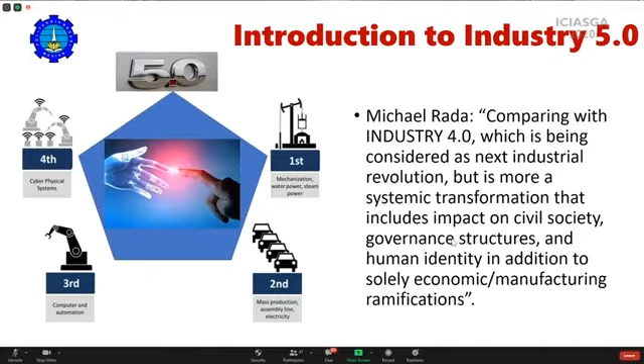This is the comparison, because it's realized that Industry 5.0 just started this year, maybe 2020. Before 2020 we called it Industry 4.0, but starting from maybe 2020, it will be moved to Industry 5.0. I will give the example of the 4.0 project in NTU in the next slide.

Industry 4.0 is the introduction of connected devices, data analytics, and AI. So if your manufacturing system or an industrial system has applied AI, data analytics, or IoT, we can call that system already applying the Industry 4.0 scheme or platform. Then Industry 5.0 we call the future, but I think it already started this year, 2020.

The fifth industrial revolution, Industry 5.0, will be focused on the cooperation between man and machine. Man and machine, or human and machine, will collaborate as human intelligence works in harmony with cognitive computing. By putting humans back into industrial production with collaborative robots, workers will be upskilled to provide value-added tasks in production, leading to mass customization and personalization for customers.

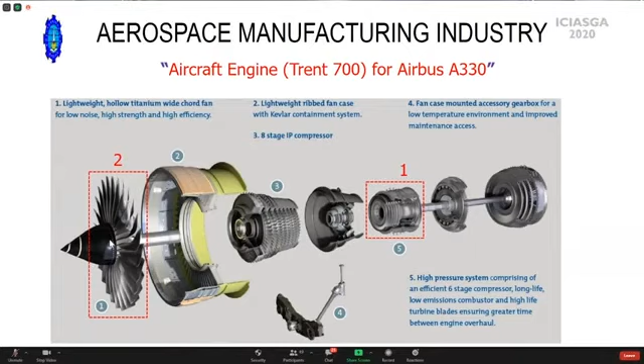The object of my research last time, number 1 and number 2, is the combustor casing and the fan blade in the aircraft engine. This is manufactured in Rolls-Royce Singapore.

Before we introduce machine learning, the previous method for polishing or abrasive processes is done as shown in these figures. We remove the materials, which we call polishing or abrasive. Once we remove the material from the surface, we then measure the thickness of the materials.

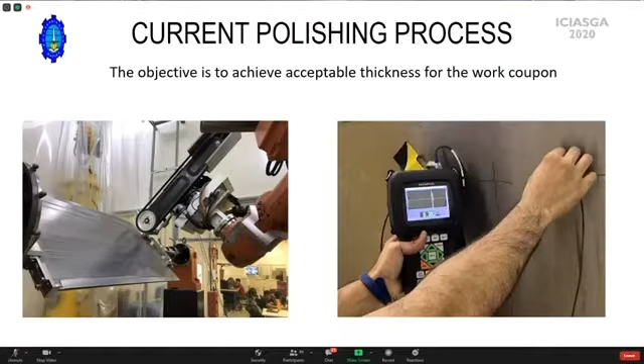So you can imagine that after doing polishing or abrasive, anytime you need to measure the thickness of the materials manually, this is time consuming and requires effort and human involvement. So we would like to remove this time-consuming work by introducing machine learning into the polishing process in the Rolls-Royce industry.

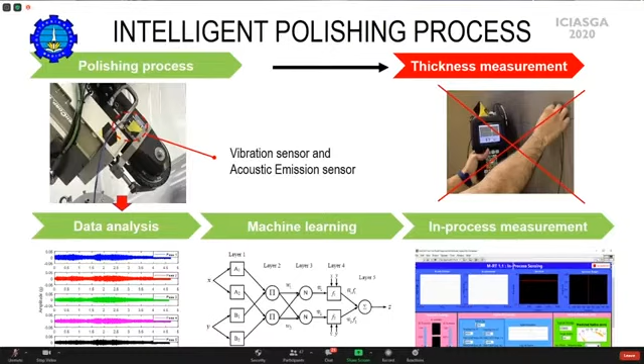So both raw data, like vibration data and thickness data, will be fit into the machine learning model, and then finally we get the model. We can also test the model with new signal without labeling, and finally the online or in-process measurement is developed. I will show the video later on.

This is a video, you can see, about 2 minutes maybe.

This is the fan blade used for the aircraft engine. There is the ABB robot doing the polishing. You can see once the tool starts on the metal surface, it will show the vibration signal. This vibration signal will be input into the machine learning.

And then you can see from this block, this is the thickness measurement of a particular point. You can see it's automatically showing like 1.2 millimeter thickness, maybe 8.2. These numbers indicate the thickness of the fan blade under processing. So you can imagine that the manual process is already removed from the manufacturing line, and it's very effective to do the process.

After this, we will see the result of the accuracy comparison between the actual thickness and the predicted thickness. You can see how accurate the machine learning is.

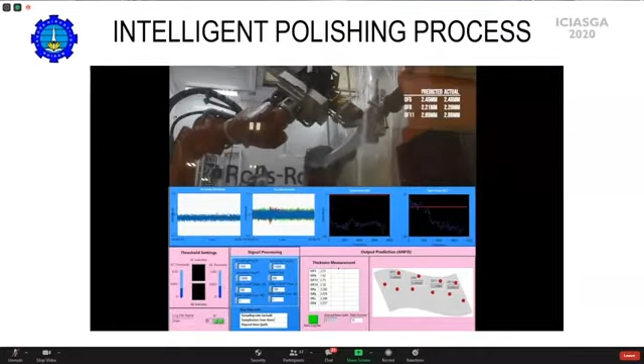Only 2.45 for the predicted and 2.48 for the actual. So it's very accurate, above 95%.

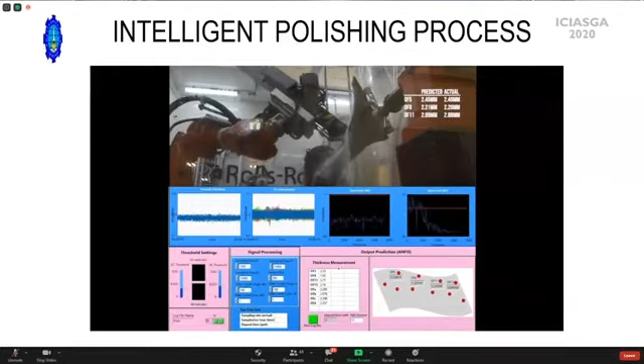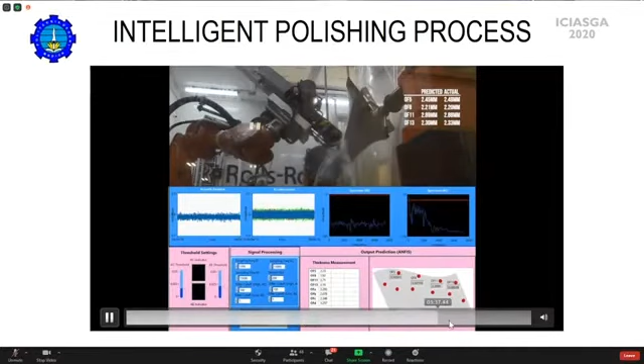So okay, I will just quickly move on. This is the application, one example of application of Industry 4.0 in industrial and manufacturing.

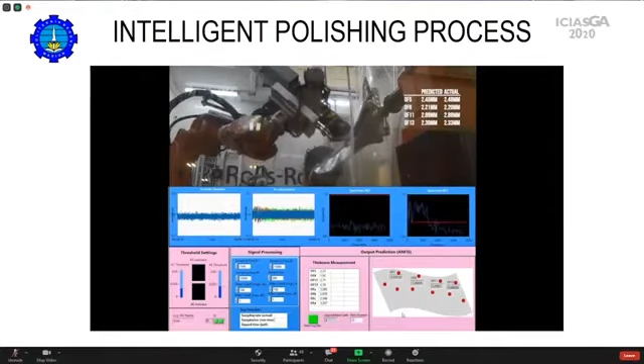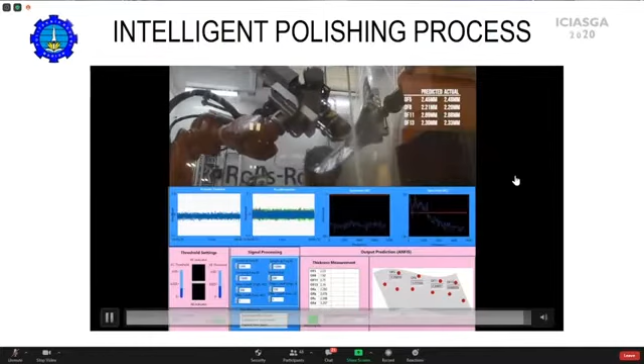So next topic is about the green technology and Industry 5.0 projects that I have supervised. I have two PhD students at the moment in University Brunei Darussalam. One is about the semi-autonomous robot as a solution to water pollution from floating trash. The second one is an Internet of Things, IoT system to improve building energy efficiency.

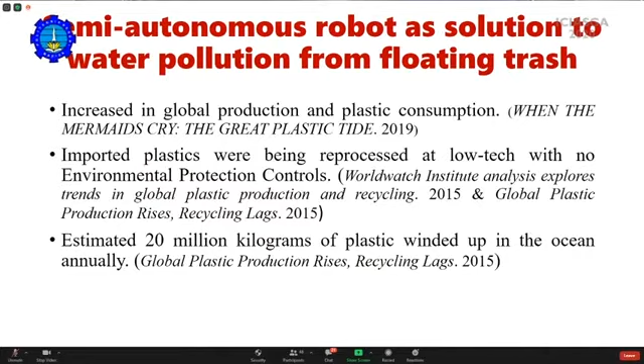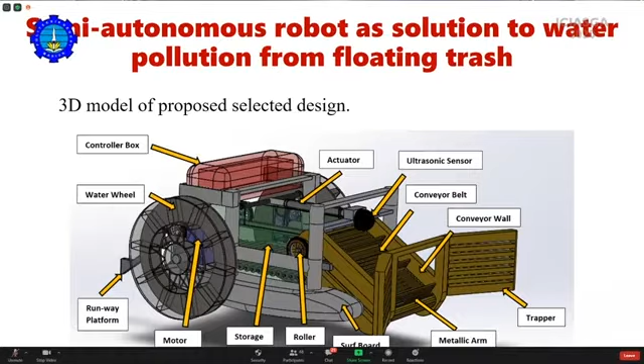So this design is made by my PhD student, and this is the schematic of the autonomous robot as a solution to water pollution.

There are a lot of sensors here. I think this belongs to Industry 5.0 because it will be like collaboration between human and robot, since humans are also involved in this activity.

So there are a lot of sensors here, I will explain maybe later on because it's still ongoing. There are maybe about 4 sensors located on the edge of the robot to detect the position.

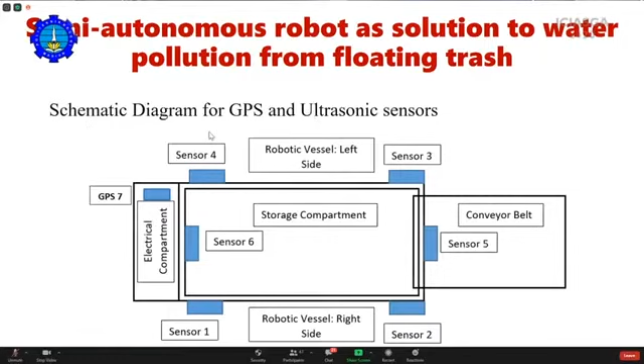And there is a conveyor belt to collect the floating rubbish or waste from the surface, and there is an electrical compartment here. Next time we will also connect to the GPS to know the location of the robot in the river. This is the first testing of the robot in a lake in Brunei.

I will just show the video showing that the robot can collect the water bottle in the river, in the lake in Brunei.

Currently, meanwhile, we just direct the robot into the rubbish, but next time we will apply machine learning or deep learning to find the location of the rubbish, and then it will collect it automatically.

Excuse me, we call it like a C-Water Robo. Thank you.

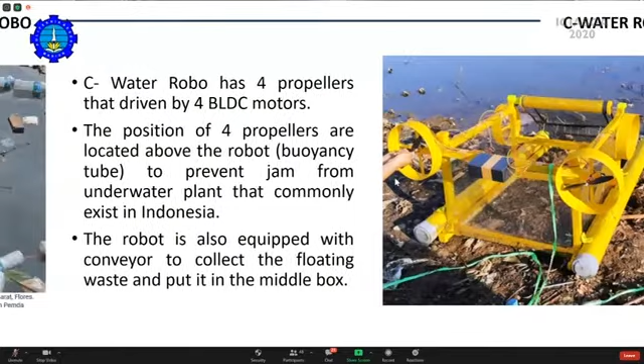In this robot there are 4 propellers. You can see from the picture, one propeller, two at the back, and two at the side of the robot. This propeller design is different from the previous one I designed in Brunei. Why? Because in Brunei, the river and lake environment is quite different - there is no underwater plants, it's just water. But Indonesia has a different environment.

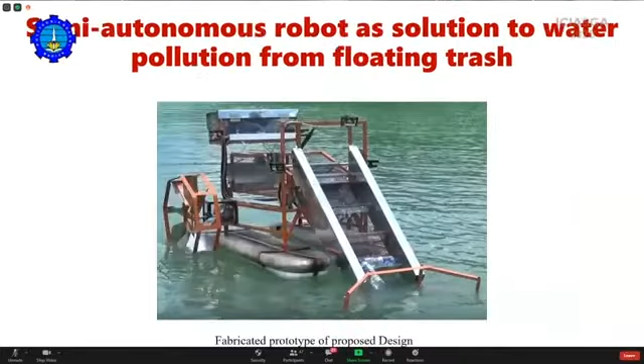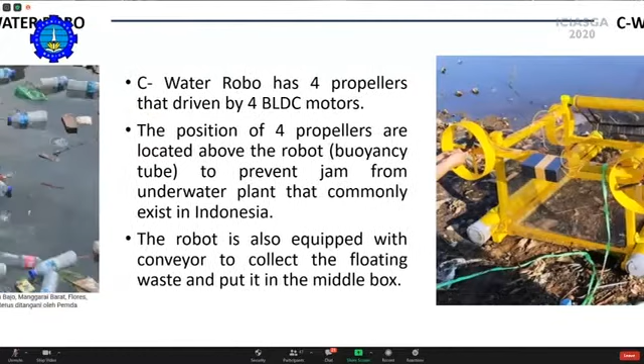Usually in Indonesia, in lakes and rivers, there are a lot of underwater plants that can trap the propeller wheels. If you design something like this, the wheels will be trapped into the underwater plant or vegetation.

So I modified my design. I think the propeller placement will be better for Indonesia because Indonesia has a different type of water. So I designed 4 propellers with 4 BLDC brushless DC motors to make the movement of the robot. The 4 propellers are located above the robot's buoyancy tube to prevent jamming from the underwater plants that commonly exist in Indonesia. This is the reason why we put the 4 propellers above the buoyancy tube.

The robot is also equipped with one conveyor to collect the floating waste and put it in the middle box. This is the front view, and this is the back view, with the conveyor. This will activate if there is some waste in front of the robot, and we will bring the waste into the rubbish box.

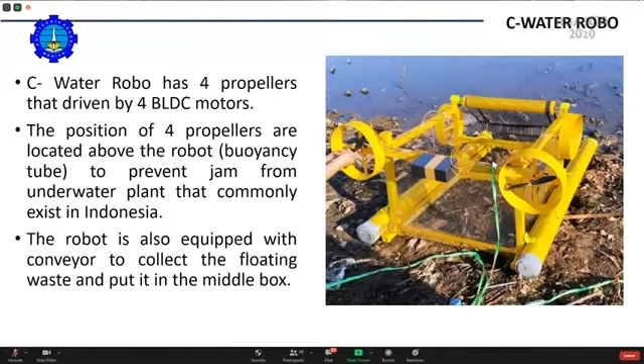This has already been tested, but not perfect yet - still ongoing. Right now we still use a remote control with transmitter to control the 4 BLDC motors and propellers, and 1 servo motor for the conveyor. Next time we will use a camera with embedded AI to detect the floating waste.

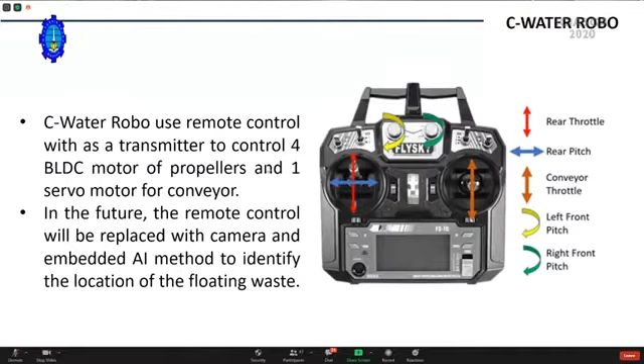Okay, so next is about the IoT system for building energy efficiency. You can see from this building - let's go, sorry - this image shows that the temperature is higher every year.

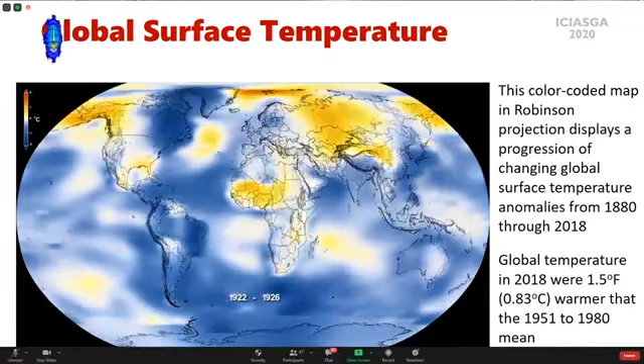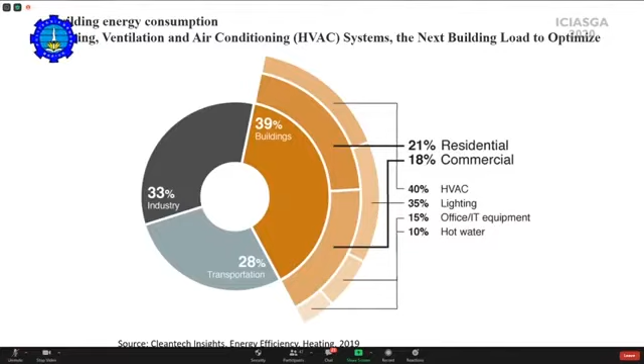So in Brunei, we would also like to develop what we call a building with a green system. You can also see from this picture that Indonesia has high energy consumption, and most of that energy consumption is from buildings. Buildings are the major energy consumer in the world.

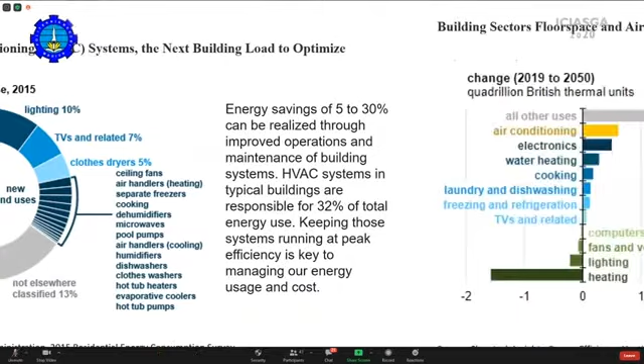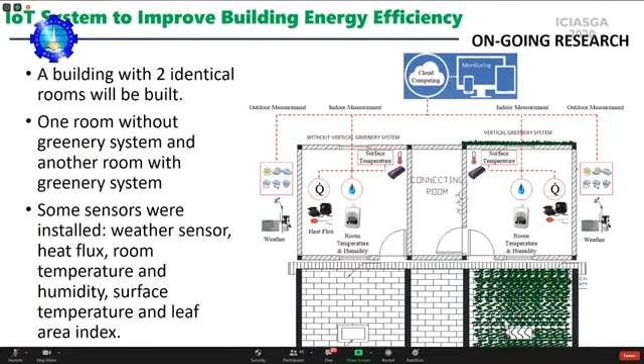We already purchased all the sensors. We will put the weather sensor, heat flux sensor, room temperature and humidity sensor, surface temperature sensor, and leaf area index sensor inside. The left building will be a normal building, and the right building will be equipped with a greenery system. We will compare them later on.

The building is still ongoing, still under construction. Hopefully next year it will be established and we will put in the sensors. Another project that will be potential for INKA and also the PN Polytechnic of Madiun is like a ride index analysis.

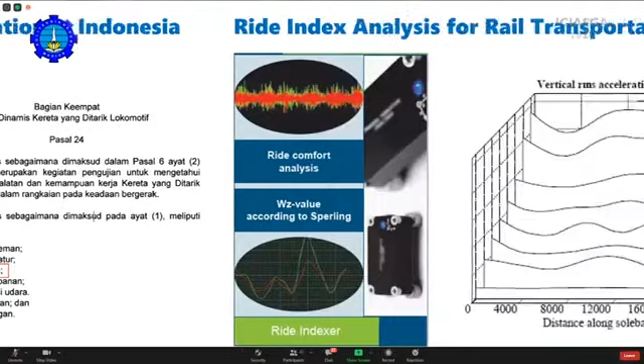I need one student from Indonesia to conduct this research. This is about the Ministry of Transportation Indonesia regulation - one important thing is vibration. So in the rail, you need to measure the vibration. I would like to develop a ride index analysis, because the one that has been bought or used in Indonesia is very expensive, but this is actually not difficult to develop our own. I would like to start this project maybe in the future if I have one PhD student.

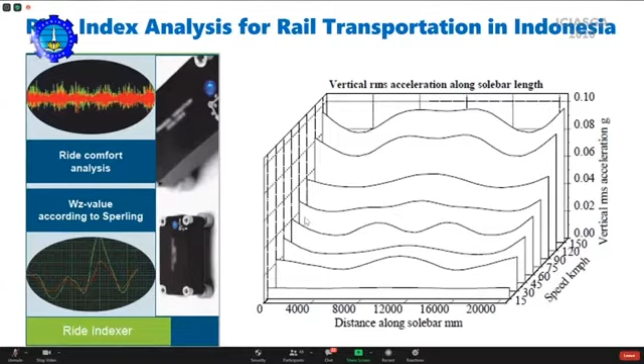Now, conclusion in my PPT, because all of my projects are still ongoing. And if you would like to collaborate with me, you can contact me by email. Thank you very much.

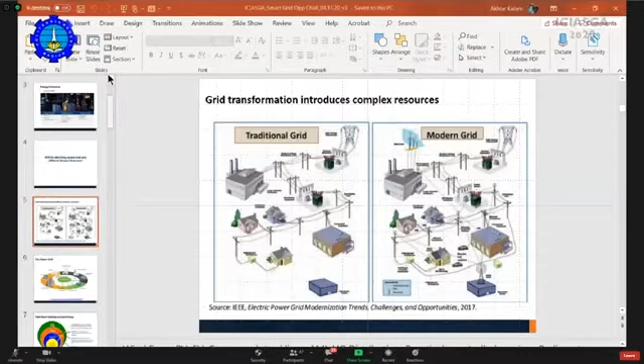Thank you very much. Assalamu alaikum. Can you hear me? Can all of you hear me? Yeah, we can hear your voice clearly. Can you see my slides, please? Is everything okay? Yeah, we can. Okay, good. Thank you very much.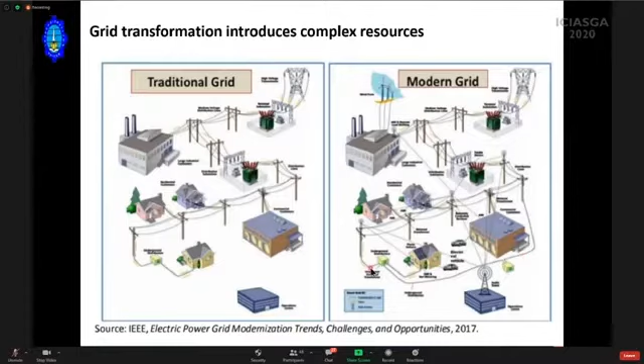Then there could be radio control receivers with a lot of smart antennas. The power flow will still be there, but along with that, there will be a new layer coming in, which will be the comms layer.

So this is my smart grid. These are my cities and offices. This is the smart house. The Professor Cassandra was mentioning a few minutes back, right? These will be the smart cities and offices. A lot of new factories. You may have nuclear power plant, thermal power plant, hydraulic power generation, solar generation, wind generation, electric vehicle, new transmission station, new distribution station, all these new types of conductors that will be coming in. So the whole grid will be completely different.

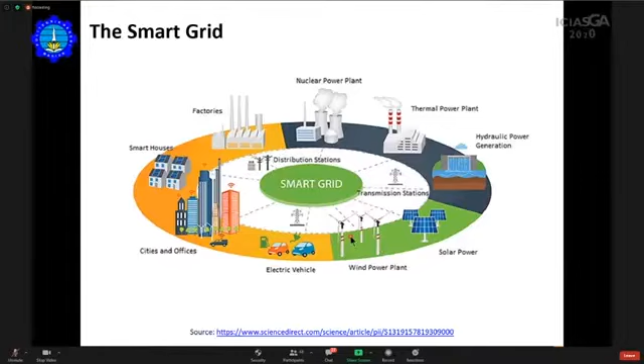Now, it won't be only smart buildings, like Professor Cassandra was mentioning about smart building. This is a very small part of the equation. The smart buildings will naturally have intelligent systems with a lot of smart devices, with grid integration, etc.

But then the whole city will be smart, which will be very complex, which will have interconnected infrastructure and services. Then the grid itself, no more will there be monoflow, it will be bidirectional. Remote control and automation will be there. A lot of DERs will come, distributed energy resources. Then the smart energy itself will be not only electric power, it could be gas, it could be smart water, everything combined together. So this is what, from humble smart building, we'll be going to a whole smart energy sector.

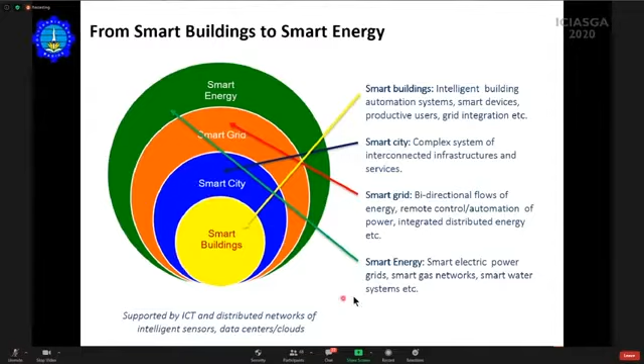Now, someone asked me a question, what is smart grid? What do you understand by smart grid? The difference is exactly similar to a normal phone and a smartphone. This is my traditional grid that we have today, and this is the grid that we are going to have tomorrow. This is the conventional one, and this is the smart one. This is exactly the same.

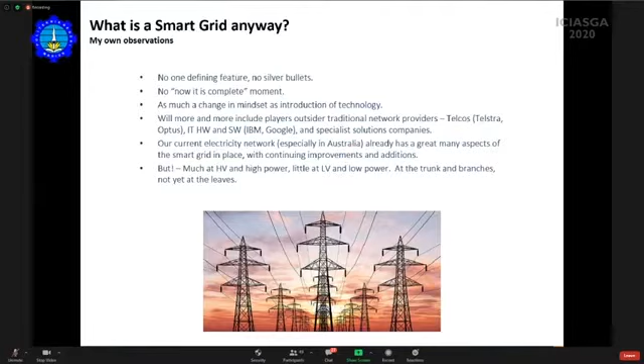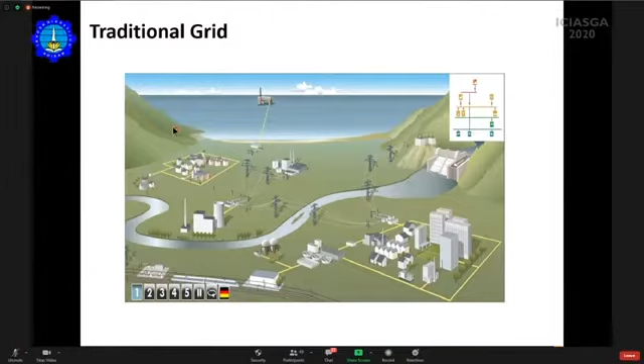So look at this traditional grid. We used to get power in our buildings and all from traditional grid. Some people use offshore plants also to get gas etc. We get it from the Bass Strait also, and we get power from there. But many people have onshore plants, and they are supplying the consumers directly from there. This is our traditional way of supplying electricity.

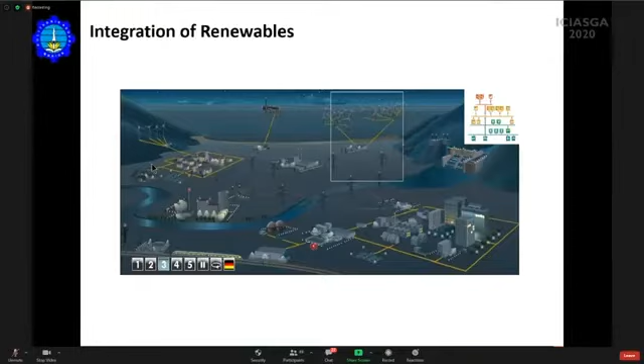Now what we have done is integrated wind over here. Look at the wind generation, either onshore or offshore. All our houses have got PV panels on top. So we have integrated renewables with the traditional grid.

Now, what is the smart grid? We will have new types of storage. We will be using plug-in vehicles - the vehicle itself will be a storage capacity. We will be using new types of charging and billing. The grid capacity will increase. You'll be using new types of load management, and we'll be going for real-time pricing. I think the off-peak period and the on-peak period that we traditionally have had for a long time may disappear.

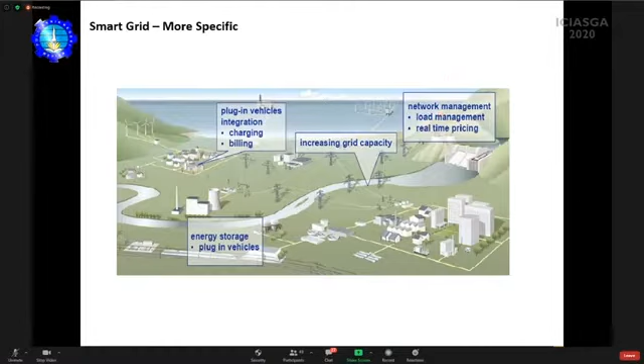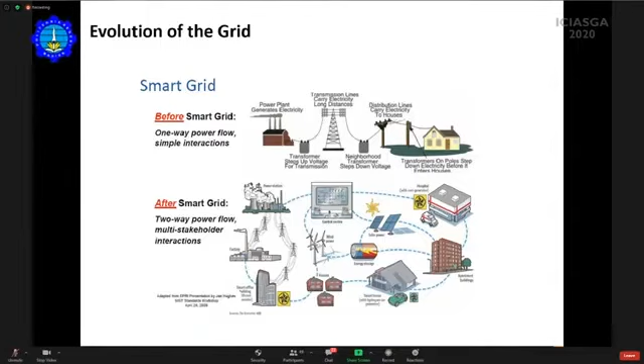So my question is, is everything now going to be smart? I believe this has been very well answered in the Harvard Business Review, where it was said that smart connected products are changing how value is created, how companies compete, and what the boundaries of competition itself are. These shifts will affect everyone - every industry, directly and indirectly. Remember, electricity is a connected product.

Smartness is basically non-commodity. Now look at that - consumers are no longer consumers. They're no longer a customer; they are prosumers - they are also producing electricity. Competition is changing the electricity sector, and the electricity sector is being heavily impacted.

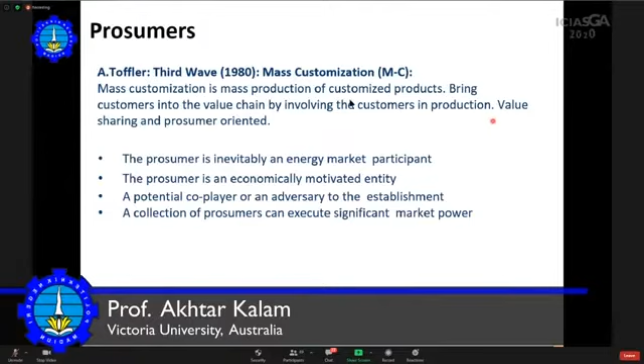So a bit on the prosumers. There's going to be mass customization - that means there'll be mass production of customized products. We will bring customers into the value chain by involving them in production, so the customers are also going to be producers. So there's going to be value sharing and a prosumer orientation. Therefore now the customer who is the prosumer is an active energy market participant. The prosumer is economically motivated. The prosumer is a co-player. A prosumer has enough market power, and that could be quite significant.

So let us look at this. Will the electricity market look radically different in the future?

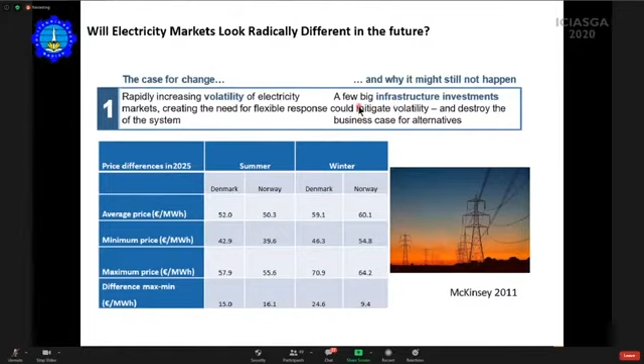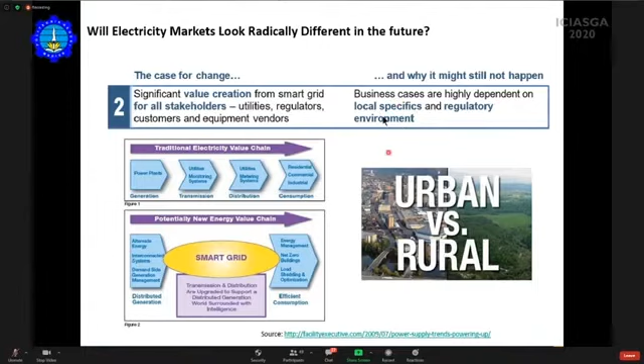Now, let us see if there is value creation for smart grid for all stakeholders—the utilities, the regulators, the customers, the vendors. If there is a new value chain, it is going to change. But it might not happen because it is highly dependent on local specifics and the regulatory environment. If the regulatory environment and local specifics are not conducive, this might not happen.

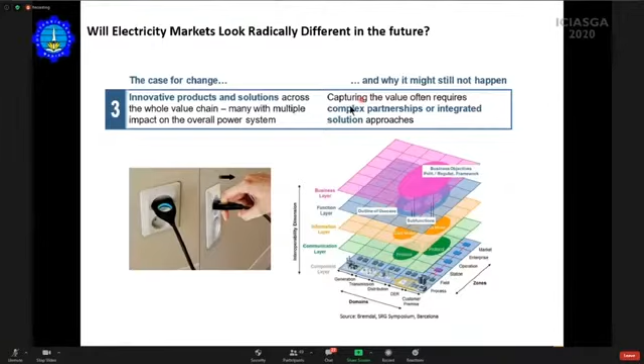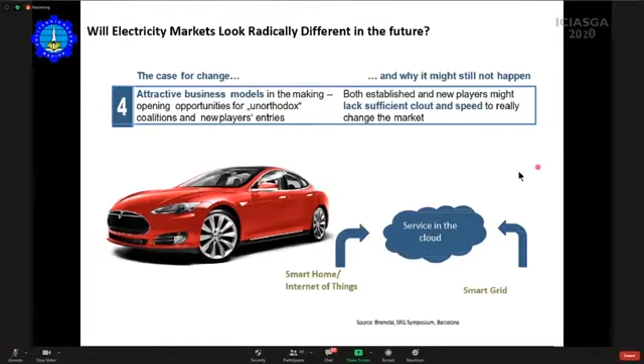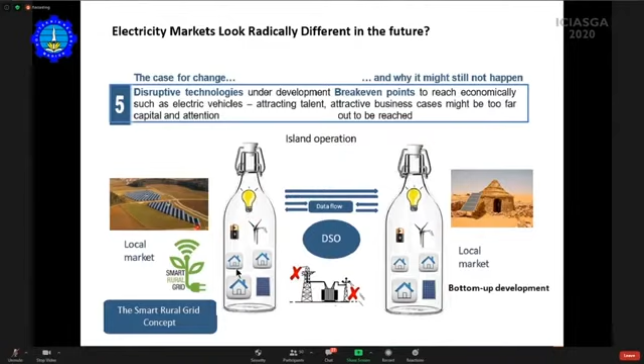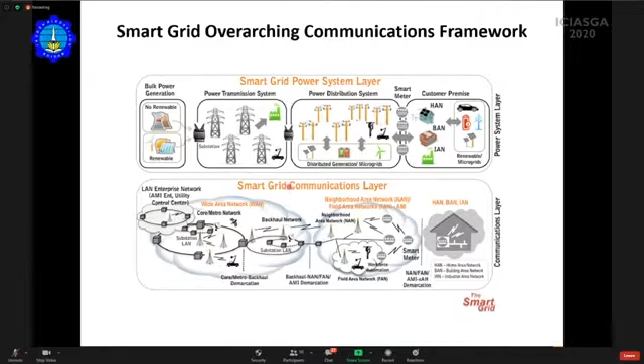So the first thing we have to do is make sure our consumers, the prosumers, the customers, are aware of such change. So a lot of education is required. Maybe this is a good chance for a State Polytechnic of Madiun to take a lead in this and teach smart grid rather than teaching conventional power systems.

A lot of rules and regulations will change. Huge things on cyber security and privacy will be coming in. Standards need to be changed. Technology is small—I told you, technology is not important. It is the mindset. If that is clear, if we have got the education right, all that will be taken care of.

So what are the attributes? The attributes will be that you will have an intelligent transmission and distribution system where there will be a lot of microgrids, a lot of islanding, a lot of switching, a lot of sectionalizing. There'll be distributed generation, what I call DERs, which will have PVs, wind, micro turbine, compressed air energy system, the flywheel. You're hearing about lithium ion batteries.

They might go away. Sodium batteries will come in. We will have new infrastructure, the AMI, which will have the broadband power line, the radio frequency mesh, the power line carriers, the radio frequency tower, where there will be a lot of readings to be done, remote disconnection to be done, the capacity control to be there, sensors to be there, and wastewater utilization will be there. That is where the gray water will come in.

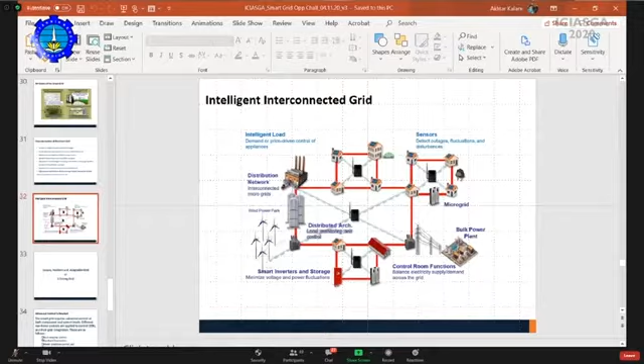Now, at the building itself, the smart building, the net zero building that I was talking to you about, in there we will be having, in the premises itself, a building where there will be an in-premise network, automated distribution resources, integrated demand-side resources. Your fridge itself, your humble fridge, will be very, very smart.

So the characterization of smart grid will be that we'll be using more and more digital information and control technologies. We will have dynamic optimization of grid operation. We will be utilizing cyber security to the full. We'll be deploying and grid integration of all DERs. We will be operating the demand response and energy efficiency program. This is where I was more concerned about.

There's a lot of problems when Professor Cassandra was talking about. He was talking about energy conservation. It is not energy conservation which is important, it's energy efficiency. You do not want your customer to lose the service that they have been used to till now. You want them to get the same services but with a better efficiency.

We want to utilize smart technologies for metering, comms, looking at the grid operation. We want to integrate the consumer devices and technologies. We want to deploy electric vehicles and storage, that is, look at the thermal storage, mechanical storage, and the electrical storage.

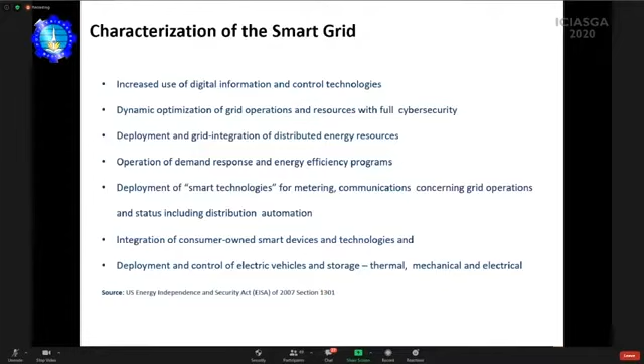So the interconnected network, look at the interconnected network. We will have intelligent load, right? We will have distribution network. We will have all sorts of wind generation. We will have smart inverters and storage. We will have control room functions. We will have distributed architecture, lots of microgrids, lots of bulk power plants, and a huge amount of sensors which will be detecting outages, fluctuations, and any disturbances in the system.

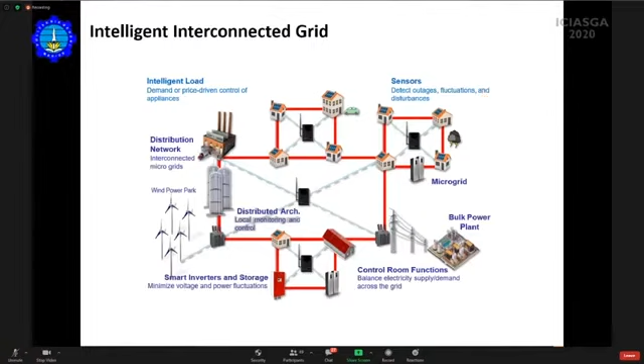So do I want a grid which is very, very strong, or do I want a grid which is secure, resilient, and adaptable? Resilient against any attack, and adaptable. So let us see what sort of control you have got, and we have to look both at the component level as well as system level.

Various nonlinear controls are applied to control the distributed energy resources and the grid integration. These are backstepping control, feedback linearization, model predictive control, and sliding mode control.

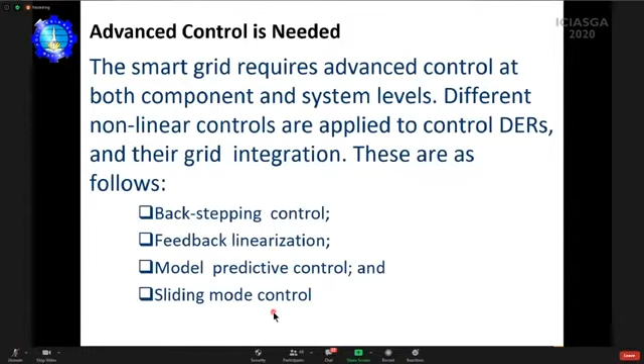So we will be relying on smart grid communication because we want to have speedy communication facilities, and that will become the integral part of the functioning of the smart grid. The future will incorporate a lot of fibers coming into the system. You will be having microwaves, global system for mobile communication, general packet radio services, 3Gs, 4Gs. Now we are talking about 5Gs. And there will be integration of artificial intelligence in this smart grid application. That's what Professor Cassandra was talking about, machine learning, etc. That'll come in.

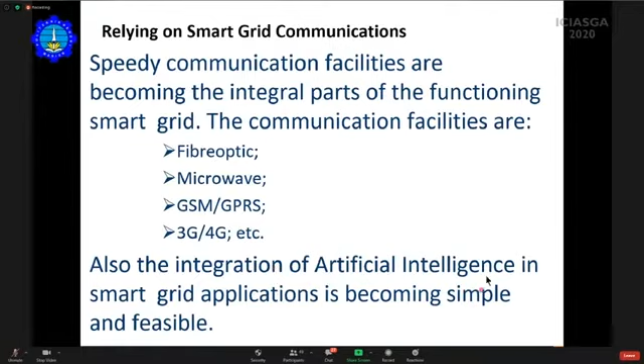So what will my smart grid look like? My smart grid, S-M-A-R-T. My S stands for signal processing, state estimation, stochastic generation, self-healing. My M stands for monitoring.

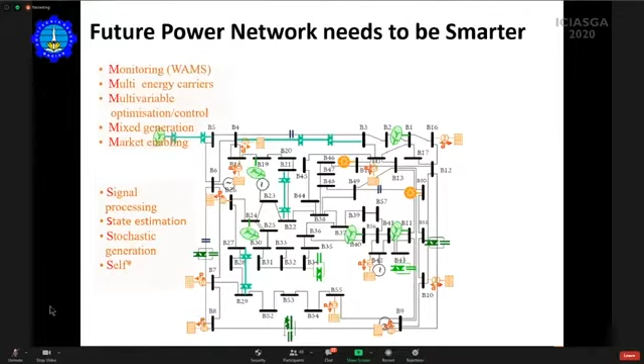I'll be using WAMS, multi-energy carriers, multivariable optimization or control. I'll be having mixed type of generation, no more just thermal, no more just hydro, all sorts of generation I'll have. And it'll be a market enabler. That is M.

A is for adaptive. You won't create a new thing, the grid will still be there. It has to adapt, and with a new hierarchical control there must be augmented power transfer. You'll be using a lot of flexible AC transmission system, and HVDC will be used for interconnection. And therefore, one of the things which is most important is that it must be affordable.

That is A. My R stands for robust. It must be responsive to demand. You must have reliable ICT. You will be using a lot of renewable energy resources. You will be having real-time control, and you will be using reduced uncertainty. And the T stands for transcontinental, tailored for individuals, tolerant to behavior patterns, and trade-off analysis.

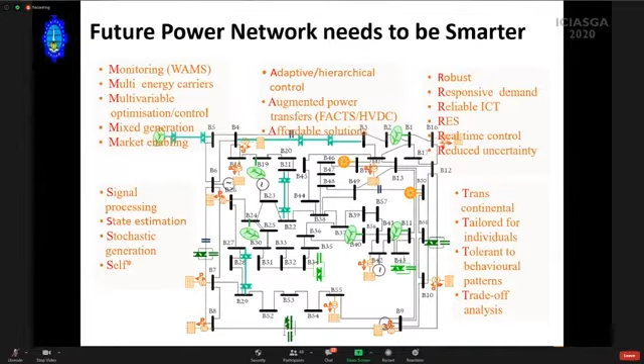This grid has to become smarter than what I have told you. So this is the smart grid, and it has to become smarter.

So in conclusion, I believe that digital revolution is changing the value chain. I also believe we have got consumers now — they are no longer going to be consumers, they are prosumers, my friend. The prosumers will gain market force.

There is a target of decarbonization of the electricity system. Professor Cassandra did mention residential homes consume a lot of electricity, but I believe transportation consumes more energy than residential homes. They are going to become a huge factor, and we have to do decarbonization.

We have to look at the distribution system operator, which will be the core of digitalization, decarbonization, and decentralization strategy. We will be using flexible AC transmission systems, HVDC systems, a lot of electric storage, and a lot of charging infrastructure.

In Australia, we have connected Melbourne to Sydney with 18 charging stations over that 850 kilometers. You can easily drive from Melbourne to Sydney in 7 to 8 hours using an electric vehicle—we've got enough electric infrastructure. In about 5 years, most of our roads in Australia will have enough charging stations for an electric vehicle to drive safely through the whole country.

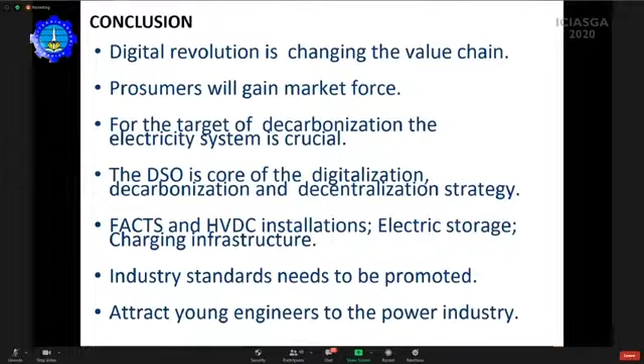Abraham Lincoln said the best thing about the future is that it comes only one day at a time. I'm glad it only comes one day at a time rather than all at once. We are learning a lot of new lessons in this COVID situation, and I'm glad only one thing comes at a time.

I'm telling you right now, smart grid is going to be the future. Smart grid is going to give your students jobs. Smart grid is going to make your young engineers much smarter, more adaptable, and able to run the electricity system to the best capability, with the highest efficiency and the resilience it deserves. Thank you very much, thanks a lot.

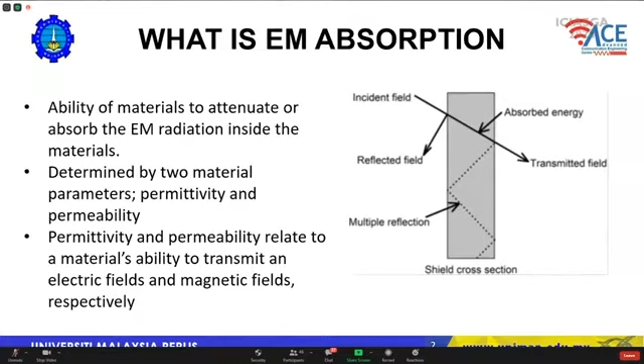So it has a capability to absorb as much as possible, and 100% absorption we call a perfect absorber. Okay, so these are the schematics of how the EM absorption happens.

So now I would like to explain about the revolutionized microwave absorber. We know that microwave absorbers are widely used for antenna or microwave device testing, and also for electromagnetic packaging, and for radar communication.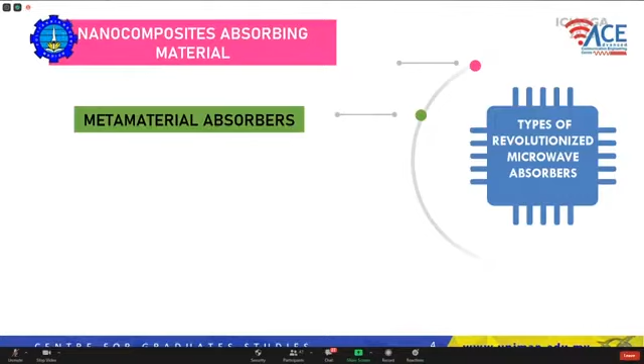The third one is the green microwave absorber. So researchers around the world today are working to design and produce microwave absorbers, because the commercial microwave absorbers nowadays are made from synthetic chemicals. They are bulky and also expensive. It is not cheap. So if you want to build an anechoic chamber equipped with a microwave absorber, you need to spend around 100,000 ringgit.

And I believe it's around millions in rupiah. So it costs a lot of money. And the third one is the revolution of the green microwave absorber, and this is also a new and future research area for microwave absorbers and also flexible antennas.

This is what we call nanocellulose. So I will explain later what nanocellulose is, which can be derived from agriculture waste such as rice straw, rice husk, and sugarcane bagasse. So the farmers in Malaysia or Indonesia no longer need to burn all this abundant waste. They can turn this waste into wealth. They can even sell it to industries that produce this type of green products.

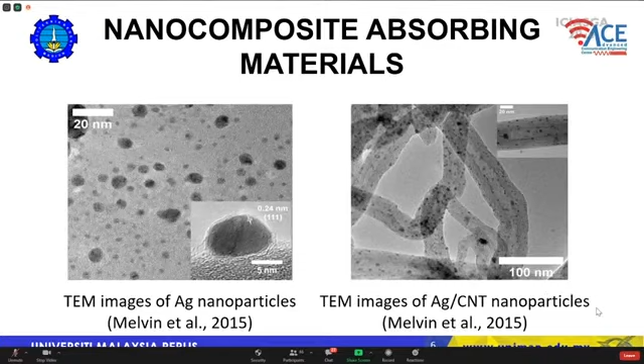Now we go to the second revolutionized absorbing material, what we call metamaterial and metasurface based absorbers. So what is actually metamaterial? People are wondering about this. Metamaterial does not exist in this world - it is actually an engineered version of the material. So we manipulate the material based on their characteristics and how we define the metamaterial.

Metamaterial depends on two parameters that I highlighted before: permittivity and permeability. In order for the absorber to be called a metamaterial, we have to ensure that either one of these parameters produces negative values - either negative permittivity or negative permeability. The lower the negative values, the higher the capability of the microwave absorber to absorb electromagnetics. Because we have these negative values, which do not exist in any material, even in green material or agriculture waste material, we compute this based on theoretical formulation, and also the refractive index is negative.

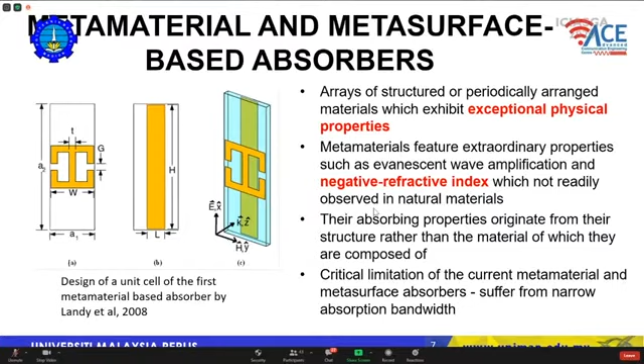The good news for this metamaterial is that besides being an absorbing material, you can also use this metamaterial feature to harvest RF energy around our environment. That will be the futuristic application of the metamaterial. These are examples of microwave absorbers made from metamaterial.

Latest - actually this is recent research that has been published - the water droplet, and here as we can see, the metamaterial is composed with a PET which is a polymer based material, FR-4. Of course we are familiar with FR-4, which is widely used for PCB electronic devices, and it can also be composed on glass.

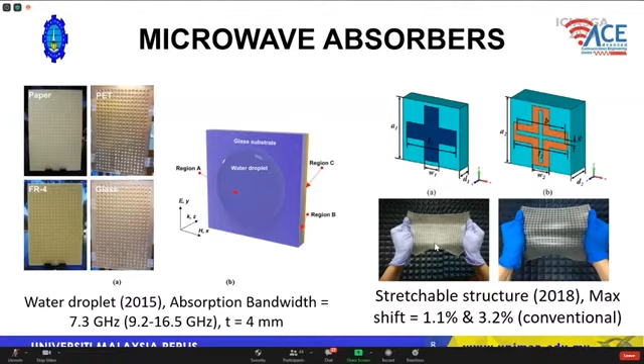The second revolution of the metamaterial microwave absorber is that it can be made flexible. It means you can bend it, you can stretch it, and regardless of this deformation, the performance of the microwave absorber is maintained. That's the beauty of this microwave absorber - we do not go for rigid absorbing materials anymore, and now people are starting to produce flexible absorbers.

Okay, so now we move to the third type, which is our interest, because this is related to green technology. We would like to turn waste into wealth. We want to recycle all the agriculture waste into something which is useful to our industry, to our society, and to the world.

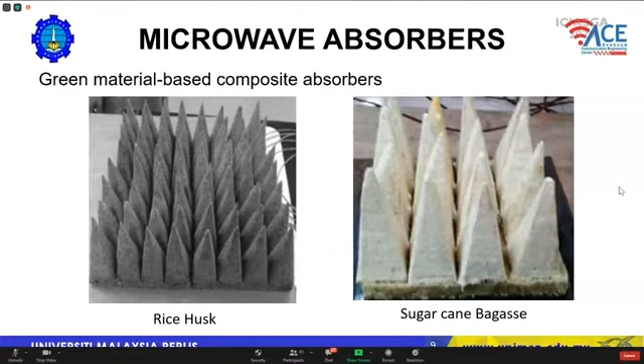So these are examples of the green material based composite absorbers. Instead of developing the microwave absorber using synthetic expensive materials, we develop the green material from rice husk and sugarcane bagasse. This is from our team, and surprisingly, the performance of this green material based absorber is comparable with commercial microwave absorbers.

Okay, so now we move to the second part of my speech for today. I would like to brief on the background of the wireless body area networks, which is also one of my expertise areas.

Excuse me, Prof. Hasliza, sorry for interrupting. I still have about 3 minutes left. Thank you. Okay, all right, thank you.

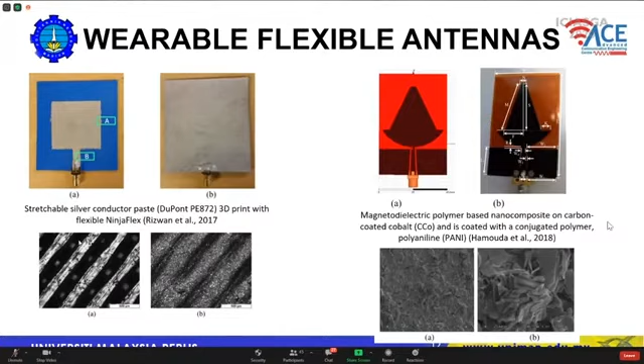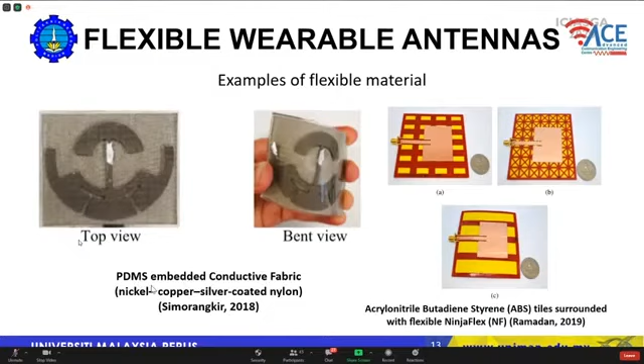So these are the wearable flexible antennas which are available in the literature. Most of them use poly-based material for the absorbing materials. And this is the flexible wearable antenna that uses PDMS. PDMS is also a polymer base.

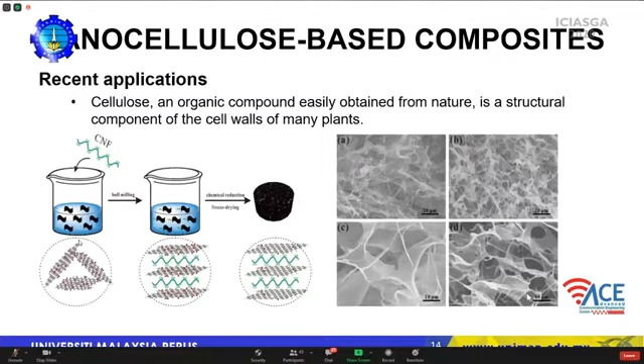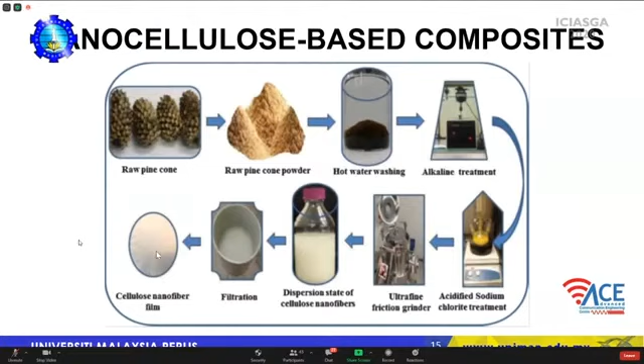And these are the nanocellulose based composite materials which are derived from agriculture waste. So this is how we produce the nanocellulose base. From the raw pine cone, we do some chemical processing, and the cellulose nanofiber films will look like transparent paper, so it's very thin.

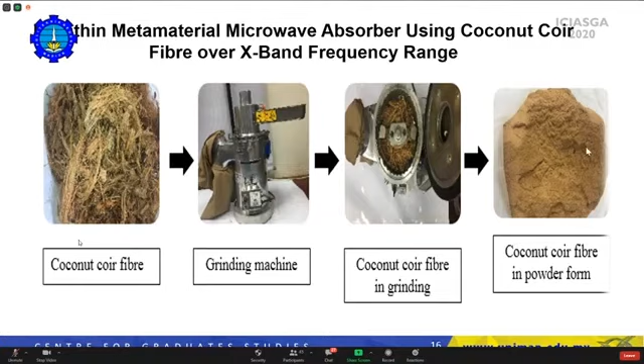And these are our current research where we take innovative steps to process the coconut coir fiber - it's called sabut kelapa in Indonesian and Malaysian language - and we grind it into powder form. So our target is to produce the ultra thin metamaterial microwave absorber using sabut kelapa.

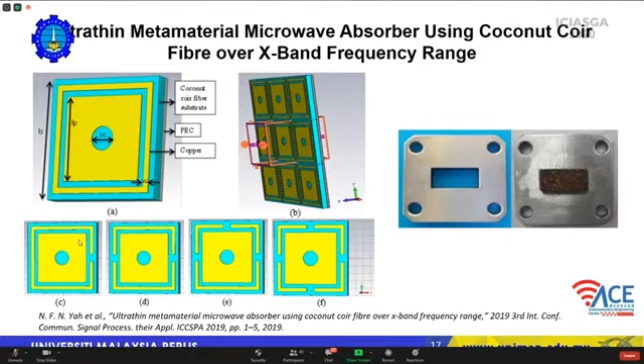These are the designs of the ultra metamaterial, and you can read our recent paper on the ultrathin metamaterial microwave absorber. Instead of using coconut coir fiber, we can try rice straw, rice husk, sugarcane bagasse, banana leaves, and so on. Why? Because all of these agriculture wastes have high carbon content, and high carbon content is actually the main factor of high dielectric properties. So these are the results.